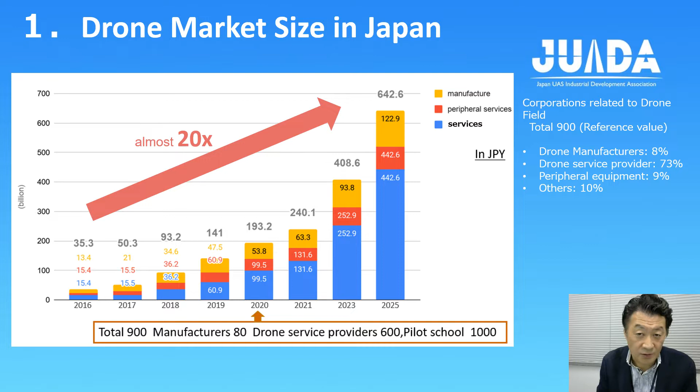This figure shows the roadmap for the industrial revolution in the sky, set forth by the Cabinet Office in Japan in 2021. This roadmap was formulated in 2015 and has been updated several times since. The main feature of this revision is the realization of Level 4, with airframe certification and pilot certification, according to the revised aviation law of 2021. For the time being, Level 4 will be realized in remote islands and mountainous areas, then developed to densely populated areas and simultaneous operation of many aircraft.

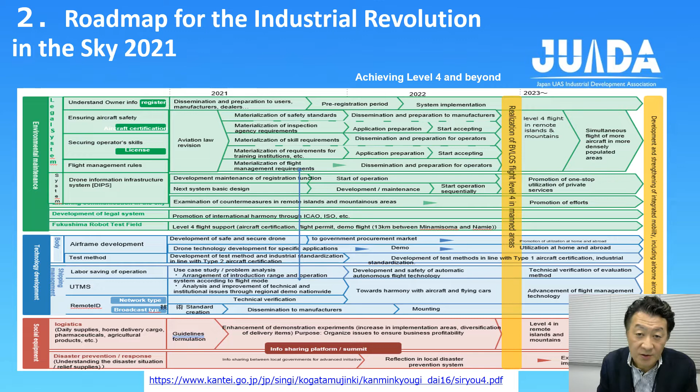Flight level 2 refers to in-sight flight without control, in which the drone flies within the visible range using the automatic operation function. Examples include geometric scanning and solar panel facility inspections.

Flight level 3 refers to unmanned, unseen flight with no assistance assigned, in which the drone flies out of sight in areas with no residents or pedestrians. This includes delivery of goods to remote islands and mountainous areas, surveying disaster damage, searching for missing persons, inspection of long infrastructure, and river surveying.

Flight level 4 refers to unseen flights in inhabited areas over third parties without assistance assigned, meaning flying out of sight in areas including urban areas. Level 4 includes urban logistics and security, rescue immediately after disaster, evacuation guidance, support for firefighting activities, and infrastructure inspections in urban areas. In Japan, the aviation law was revised in 2021 to allow Level 4 flights, and the social implementation of logistics drones is expected to accelerate rapidly.

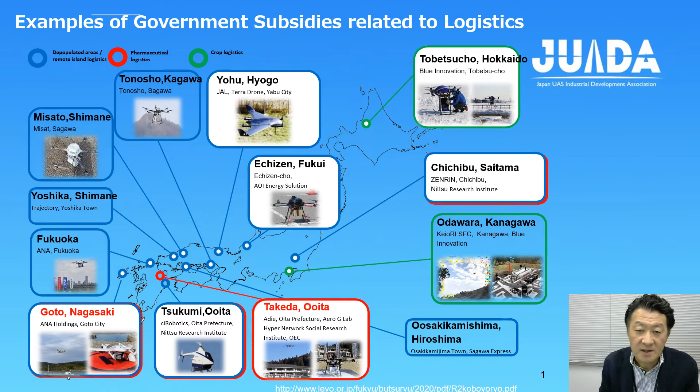Most of the experiments are not conducted in urban areas, but in mountainous areas and islands. The Ministry of Land, Infrastructure, Transport and Tourism has set up a drone logistics business model study group in depopulated areas to consider policies for dealing with issues when introducing a drone logistics business.

The guideline for delivery has been compiled. The contents of this guideline will be reviewed in a timely and appropriate manner in light of future changes in the situation. Maintaining logistics functions is a very important issue from the perspective of universal service, especially in depopulated areas. Drone logistics are attracting attention in order to improve the efficiency of transportation and delivery.

When delivering medicines, it is necessary to deliver them in accordance with the regulation of the Pharmaceutical and Medical Device law, but the specific method of delivery by drone is not explained. For this reason, the points to keep in mind for delivery by drone have been summarized as the Guideline for Delivery of Medicine by Drone.

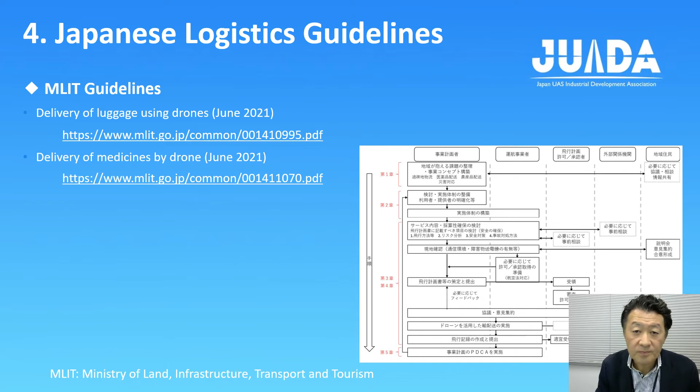We, JUIDA, as the largest drone industry association, cover the requirements for logistics companies to realize safe drone logistics operations, such as prerequisites like drone requirement function and air route, responsibilities of logistics companies such as air route setting, creation of operation manuals, risk assessment, related laws and regulations, permissions and notifications, and issues to be discussed continuously, including guideline issues.

In this section, we will introduce some examples of drone logistics demonstration experiments that have been conducted so far.

Yamato Holdings is one of the largest logistics service companies in Japan. For last-mile transportation, they have been working in cooperation with Bell Helicopter and Textron Corporation to build a new air transportation mode in the future. Also, they are collaborating with the Japan Aerospace Exploration Agency, JAXA, to realize a new transportation mode in the sky.

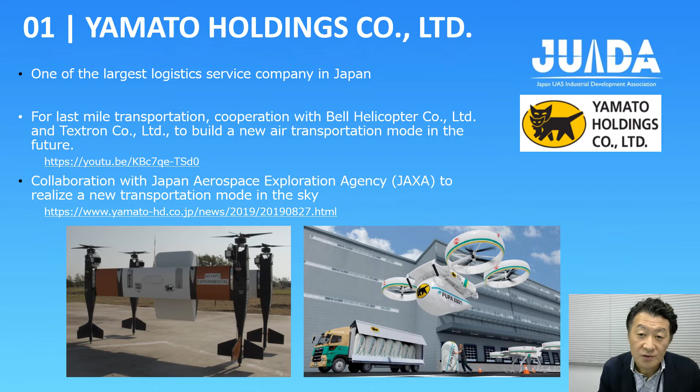The Sagawa Corporation is also one of the largest logistics service companies in Japan. They are collaborating with Eames Robotics Corporation, providing multiple drone delivery in mountain areas with remote control from their Tokyo head office.

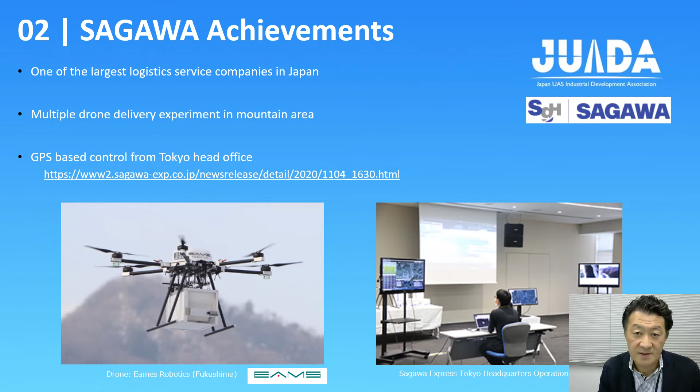ANA Holdings is a Japanese worldwide airline company. They chose the Wingcopter 178 heavy lift made by the German company Wingcopter and have been trying delivery of medicines with a flight speed of 100 km per hour for a round trip of about 32 km. Also, they have tried instant delivery of 7-Eleven's online convenience store products and prescription drugs.

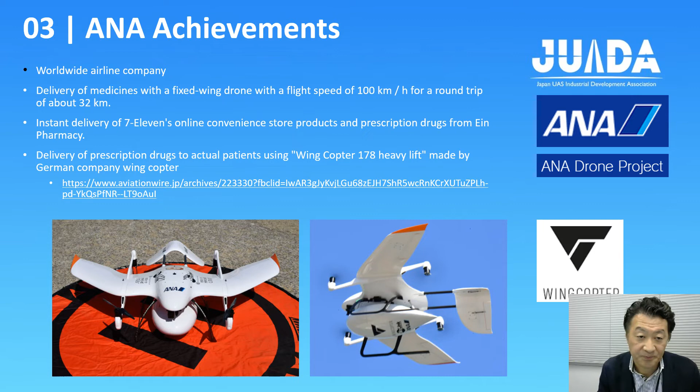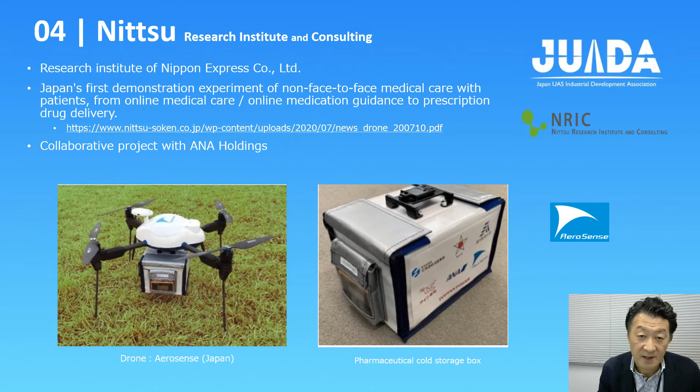This company is a research institute of Nippon Express, Japan's oldest logistics company. They performed Japan's first demonstration experiment of non-face-to-face medical care with patients, from online medical care and online medication guidance to prescription drug delivery, in cooperation with ANA Holdings and other drone companies.

Blue Innovation is a drone platform company. They focus on rapid construction of the drone platform in case of disaster. The platform enables digital transformation and automation of various tasks through remote and automatic control, and cooperation of multiple drones, robots, and various devices.

Other latest activities in Japan are described below.

Next, I'd like to show you some unique activities focused on drone operation control.

When flying a drone in a public place, it is necessary to apply to the Civil Aviation Bureau for permission beforehand, and DIPS is the system available for this. In DIPS, the applicant creates an account and enters information about the drone and the pilot, as well as detailed information about the purpose, date, time, and location of the flight. Normally, permission is granted in about a few days, but depending on flight conditions, it may take a month or more. The website has an English page.

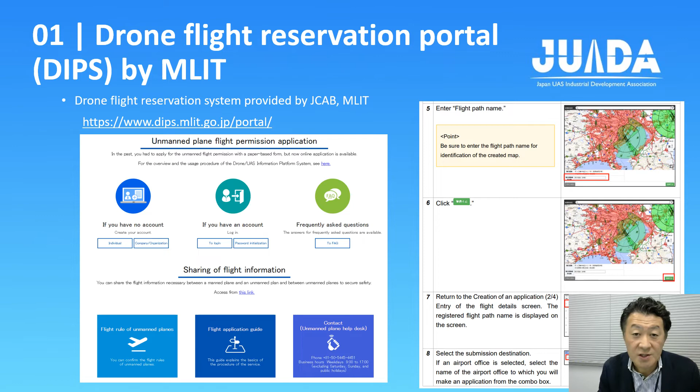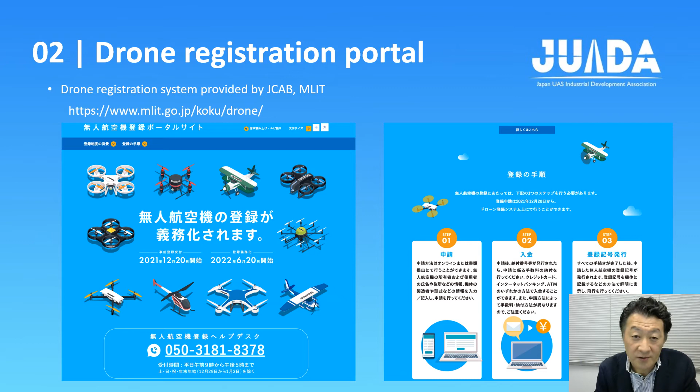Following the revision of the aviation law, registration of unmanned aircraft will become mandatory in Japan from June 2022. A portal site for this registration was opened just a few days ago. Applications can be made online or by document, and once payment is made, a registration symbol for the unmanned aircraft will be given. The registration code will be displayed on the aircraft for flight. This registration requirement applies to all drones weighing 100 grams or more.

Remote ID is a method of remotely recognizing the registration number assigned according to the certified drone, in conjunction with the mandatory registration of unmanned aircraft beginning in June 2022. The remote ID emits the drone's registration information, serial number, location information, time, and authentication information using Bluetooth 5.0 or similar technology. The transmitter will be attached to the drone by the user, while the receiver will be installed by the aviation authority, police, or administrator, not the general public.

EAMS Robotics Corporation will integrate the system into all drone manufacturers after June 2022. The company will also release transmitters that can be externally attached to conventional aircraft and drones from other manufacturers that are not equipped with remote ID.

The ID information transmitter radiates waves up to 1,000 meters in an environment with good visibility. This makes it possible to keep track of drone information in flight, even from remote locations.

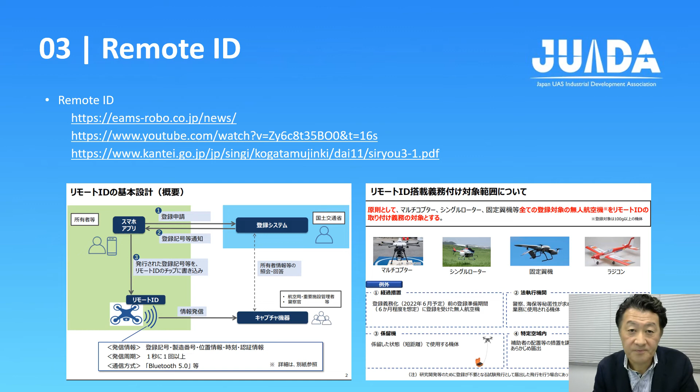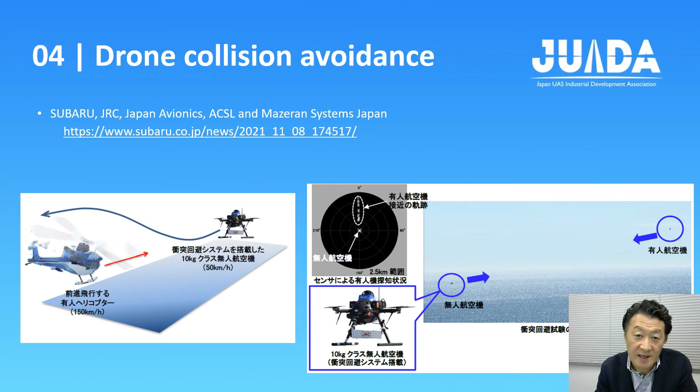Autonomous collision avoidance under conditions where drones and general aviation aircraft mix is important, and such experiments are expected to increase in the future. Subaru, Japan Radio, Japan Avionics, ACSL, and Magellan Systems Japan have successfully conducted the world's first autonomous collision avoidance test in wide areas of airspace at a relative speed of 200 km per hour, the actual operational speed range, using a 10 kg class unmanned aerial vehicle equipped with a miniaturized sensor with low power consumption.

I would like to introduce the Fukushima robot test field, which is a characteristic development base for drones and eVTOL. It is a facility unlike any other in the world where you can evaluate the performance of robots and perform maneuvering training by reproducing actual usage environments, such as infrastructure and disaster sites.

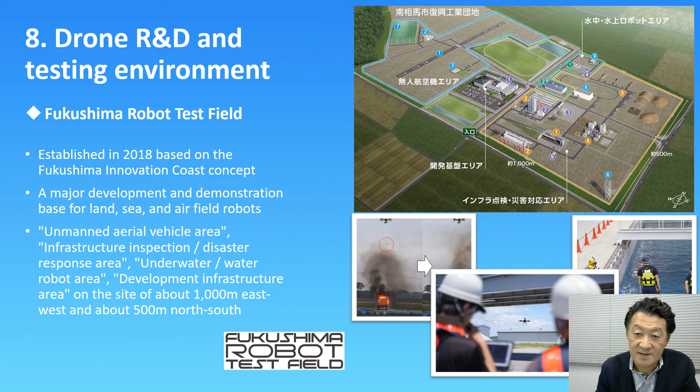This is part of the equipment that features the unmanned aerial vehicle area. The runway is 20 meters wide and 500 meters long, used for flight tests and pilot training. The large buffer zone allows for special flight tests such as collision avoidance, crash landing, falling, and property dropping. It has a hangar directly connected to the runway, a measurement room overlooking the area, and an antenna installation stand. There is also a heliport and communication building.

There is another runway about 13 km away from this field, which allows you to set up a safe test flight course on land at the sea for long distance and wide area flight training. In addition, there are private airports and airfields nearby, and large-scale demonstration experiments connecting these are possible.

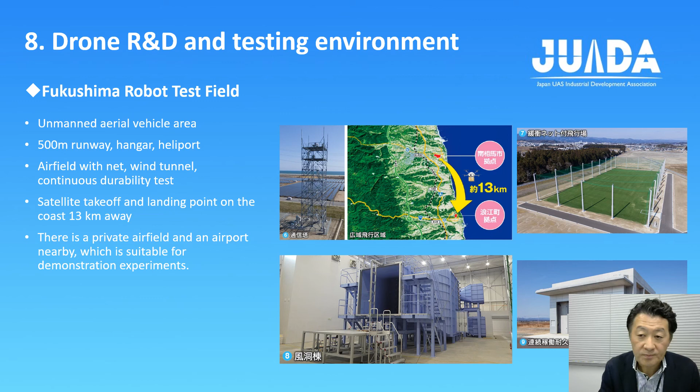In addition, current drones have a flight time of less than 30 minutes, making it difficult to conduct multi-point orbiting missions or long-distance flights of 50 km or more. Therefore, several companies are developing airplane-type drones and hybrid drones equipped with internal combustion engines and power generators.

Furthermore, it is presumed that an environmental assessment of the urban space where the drone will fly will be necessary. Environmental assessments are concerned about noise, wind damage, fear, and impact on the landscape.

In Japan, drone logistics is in the midst of ongoing demonstrations, and economic success is likely to be the next step. Together with the revision of the civil aviation law, rapid development is expected in the next 5 years. Thank you very much for your kind attention.